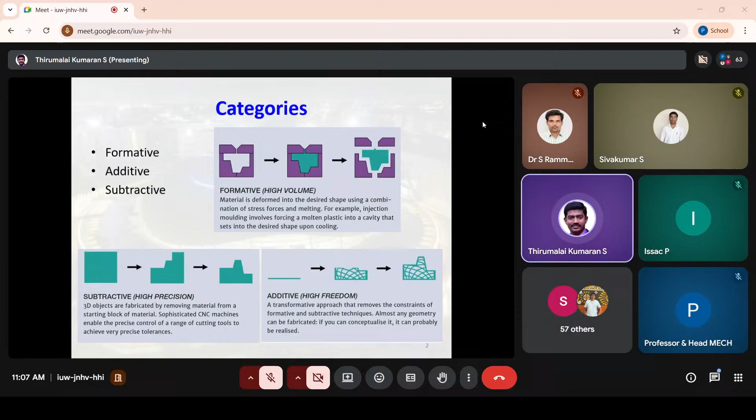And by conventional, the next category is subtractive manufacturing, where all our CNC milling, drilling, boring, reaming, tapping, everything comes under this subtractive manufacturing. This has to be chosen when you need high precision. So basically we have to choose the right manufacturing process for manufacturing our product. This is the basics.

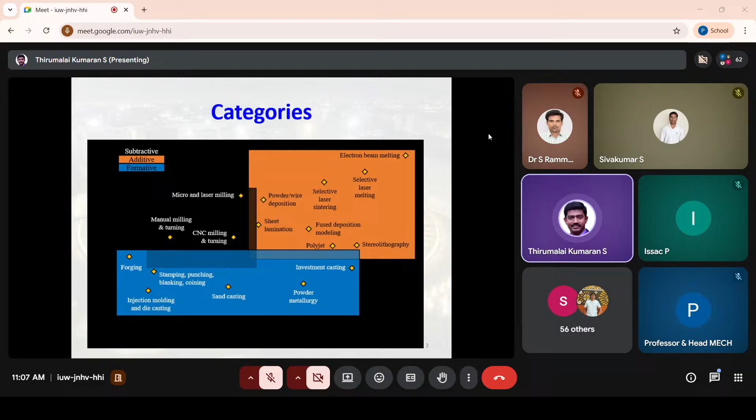As I told you about the classifications, in this lecture I will be talking only about subtractive manufacturing, because additive manufacturing is a new topic I will cover separately. So I will focus just on subtractive manufacturing. Basically we know that in normal subtractive manufacturing we have turning, drilling, milling and some other operations.

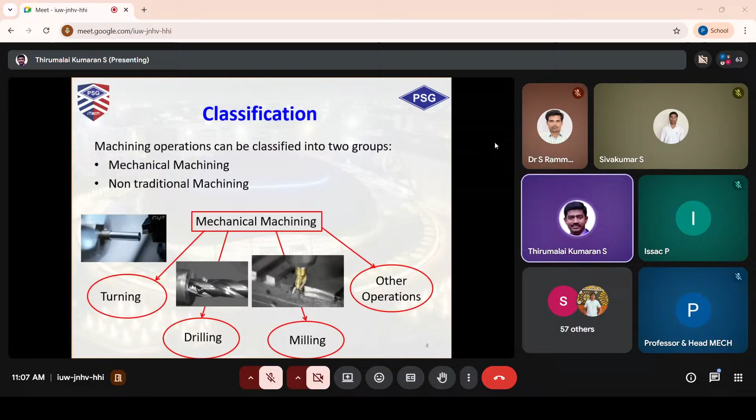So in mechanical machining we have these categories, and there are also some non-traditional machining categories. In non-traditional machining we can classify into four different types. One is by using mechanical energy, that is ultrasonic machining and water jet cutting. This comes under the mechanical energy process, where you use mechanical force to remove material and create an end product. These things come under non-traditional machining.

Then comes the electrochemical process, where ECM, electrochemical machining, comes into picture. Here we use some chemical substance and electrical current. So it is an electrochemical process through which we remove the material.

Today, advanced new technologies like biomachining have emerged, where they use bacteria and do a lithography process to remove unwanted material. This is called biomachining, which is recently very popular. In India, only 3 to 4 members are working in biomachining, so the demand is very huge, but there are not many scientists or faculty working in that area. Abroad, biomachining is very famous, because it needs the help of chemical engineers and biotechnologists. So this also comes under non-traditional machining.

Then comes the third category, called thermal energy process, where we use thermal energy like heat, either from an electron beam, a laser beam, or a plasma beam. We use purely thermal energy to remove material. And finally comes pure chemical machining without electricity. So these are the types of non-traditional machining.

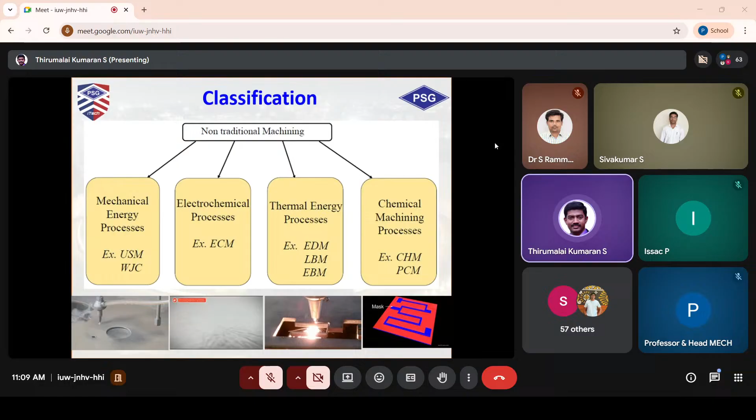You may have recently gone through papers addressing either traditional or non-traditional machining, but my area is about hybrid machining, because in the conventional machining processes I've just discussed, we cannot achieve very high precision machining. Suppose you expect that in your component you need an accuracy level of 10 nanometers - that is not at all possible using either non-traditional machining or conventional drilling or milling.

So 10 nanometer precision is very high in demand. Similarly, if your material removal rate should be approximately 10 power minus 3 or 10 power minus 4 mm cube per second, that is also not possible with conventional subtractive machining. So this is the objective you have to fix first: why you are doing the work and what is your target precision level.

As I told earlier, if you need higher precision, you should go for subtractive machining. If you need higher degrees of freedom, you should go for additive manufacturing. And if your number of samples is high, you should go for formative manufacturing. So our objective in subtractive machining is precision - you need to define the precision accuracy you are expecting and how it can be approached, and what type of subtractive machining you have to choose to achieve this high accuracy level.

But whatever we have discussed so far - normal drilling, milling, and boring, and non-traditional machining like mechanical energy, thermal energy, electrochemical energy - we cannot achieve this high precision. That is where hybrid machining comes into picture. Suppose you want to integrate the positive and negative aspects of different processes - for example, you choose grinding only when you need surface polishing, and lathe is done for cylindrical objects for a certain output. So we can integrate these types of subtractive processes, which is called hybrid manufacturing or hybrid technologies. So for a researcher, please don't expect only conventional machining or manufacturing processes - create some new hybrid technologies so you can achieve a better accuracy level through subtractive machining.

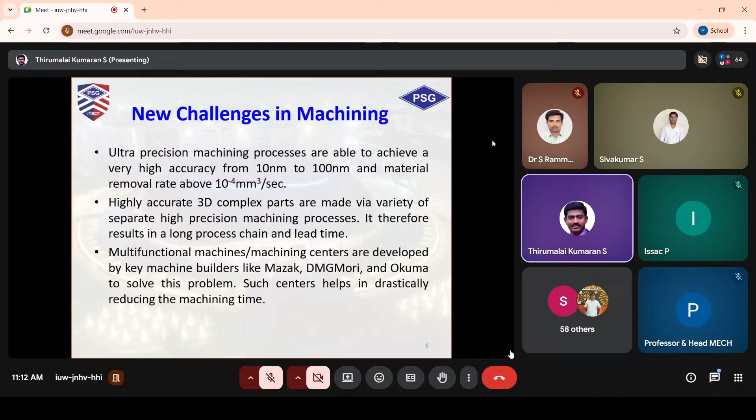Yes. No response. Am I audible? Yes sir, you are audible sir, your voice is audible. Maybe they are not interested, I think so.

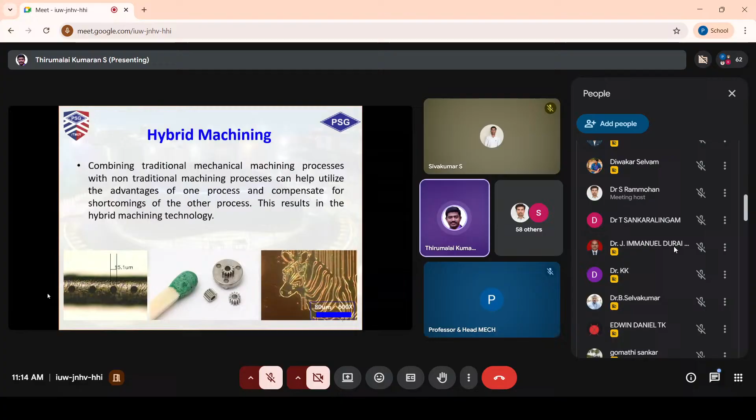Then you formulate the challenges - whether to do the conventional process, subtractive machining, a normal drilling process - and find out which subtractive machining or hybrid technologies you can choose to get this precision level. My precision level here is a 15 micrometer drilled hole. So this is the first task.

Now see the second picture. Can you see the gears, how they've been formed? See the size of the gears, compare with the matchstick. This is the precision level you should achieve through subtractive manufacturing, which is not at all possible by conventional methods - drilling, milling, reaming, planing, whatever you choose, you cannot achieve this.

Even you cannot achieve this using non-traditional machining, so that's where you have to prefer some hybrid technologies. You should have a clear objective, clear target, what your precision level is, then choose which process can be selected and which hybrid technologies can be mixed, and face the challenge to create this product. And the third picture, can you see?

It's just a zebra, but see what micron level - we've created this in an 80 micrometer sheet, 80 micrometer, that is 80 times 10 to the power minus 3. Very thin metal sheets, we have created this. We used biomachining actually - earlier I told you about biomachining - we used biomachining to fabricate this third picture.

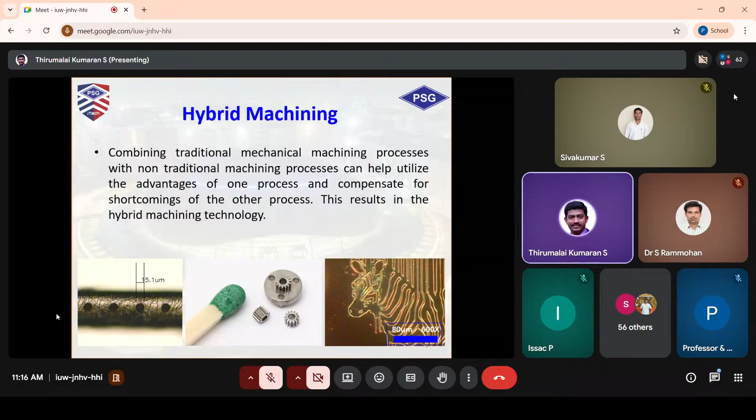So there are many other technologies in hybrid machining. One by one I will inform you, and later I'll move on to optimization. In hybrid machining there are several types. The first type is sequential. Sequential means, with the name itself you can understand, the process will be in sequence - first you complete one process, then after completion proceed with the second process.

For example, you do turning, remove the material, then go for milling, remove the material, then go for drilling, and get the final product. So this is a sequential type of machining. After completion of the first part, it moves to the second process. After the second process is over, it moves to the third process. So this is called a sequential type.

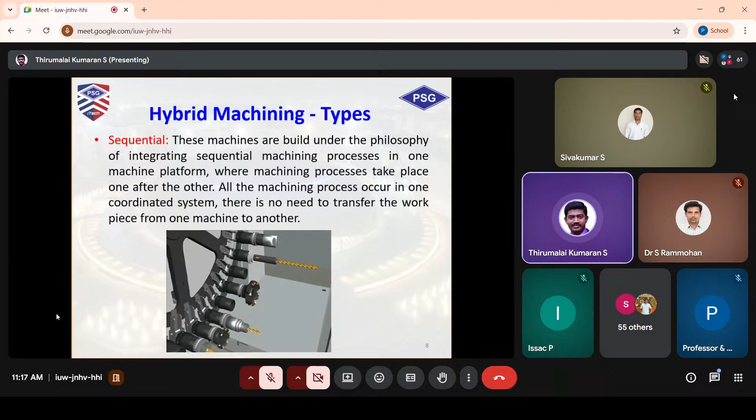It doesn't mean it should be only in machining - you can also couple processes, like one machining and the second process being welding. You can see this paper which we published in Materials Chemistry and Physics, Elsevier. What we particularly did is a hybrid technology between abrasive water jet machining and welding.

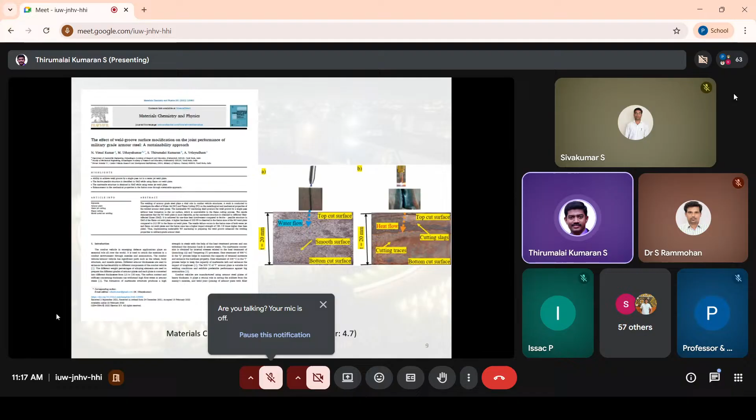Just imagine - we merged abrasive water jet machining and welding. These two are completely different processes, but we created a hybrid technology by combining abrasive water jet machining and welding. So this is the innovation to achieve the desired target.

So that publication won't be a big matter, we can easily publish. The only thing is we should achieve our objective. First clearly define your objective, you should have some challenges - without challenges, please don't select any research topic, otherwise it is very difficult to publish. Maybe some Q2, Q3 publications you can make, but if you want Q1 papers, target very challenging work and do some hybridization like we did.

So this is the first example of what we have done.

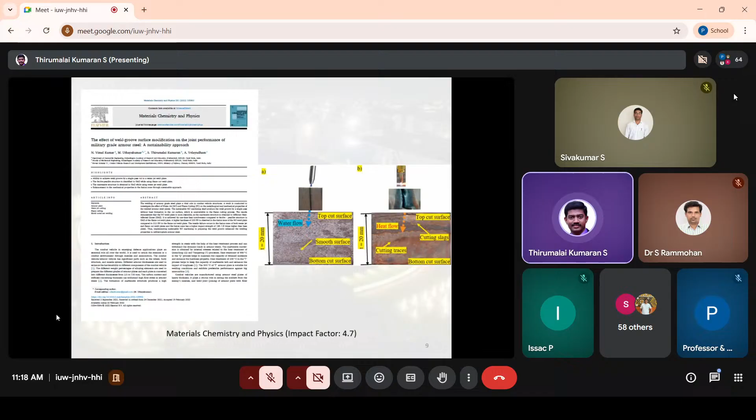So the first thing I've told you about sequential.

The second one is called assisted hybrid machining. So we have some assistance. For example, if you are doing a drilling process, you can make vibration to assist your drilling. So in drilling, the tool will also vibrate and do the drilling. So it is vibration assisted drilling. There are many other processes like this, laser assisted, vibration assisted. These technologies will assist you to do the normal process.

You choose lathe, you choose facing process. In that you can make laser to assist, you can make abrasive to assist. So these assists will help you. This is called assisted hybrid machining. I think it is clear now.

You can also make some media to assist, like cryogenic assisted or gas assisted. I think everybody is familiar with MQL, minimum quantity lubrication, so MQL assisted. So you can frame your process as assisted manufacturing or assisted machining to do your task.

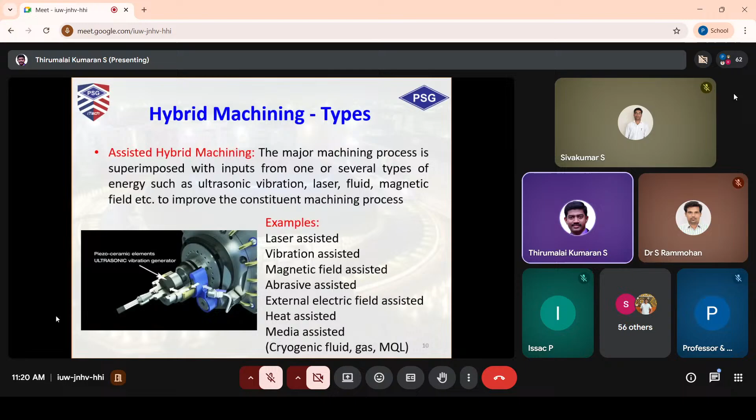For example, you can see this, one of our papers published in Measurement, with the title ultrasonic assisted EDM. I think EDM machining everybody knows, electrical discharge machining. The one which we preferred is die sinking EDM. In EDM we have two different types, one is die sinking EDM and the other is wire cut EDM. We preferred die sinking EDM and made ultrasonic to assist. To create the ultrasonic, we used a Langevin wave transducer, shown in the picture bottom right, to create the ultrasonic frequency and do the EDM process.

So we have made an assisted machining. Conventional EDM, everybody would have done, but we made ultrasonic assisted machining. So this is the novelty, so you can make use of creating a new process and achieve your target very easily. Publication actually comes out of this, so no need to worry about publication. It comes because it's a new technique, addressing a new novel process with a clear objective. Your novelty is clear, so publication will automatically come. So this is the example for assisted machining.

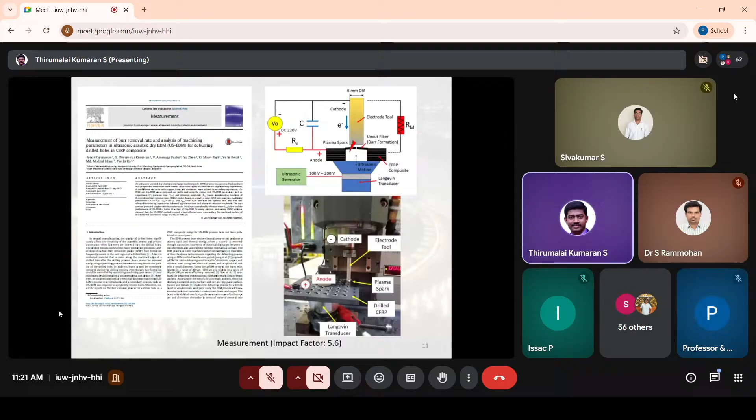One more example, published in Precision Engineering, again Elsevier. Here it is also ultrasonic assisted, using elliptical vibration to create a micro groove. The micro groove dimensions and depth are given in the picture. We created a comparison between without ultrasonic, how the precision level was, and with ultrasonic, how the precision level was. So you can just compare what happens when you do assisted machining. These are the examples of assisted machining.

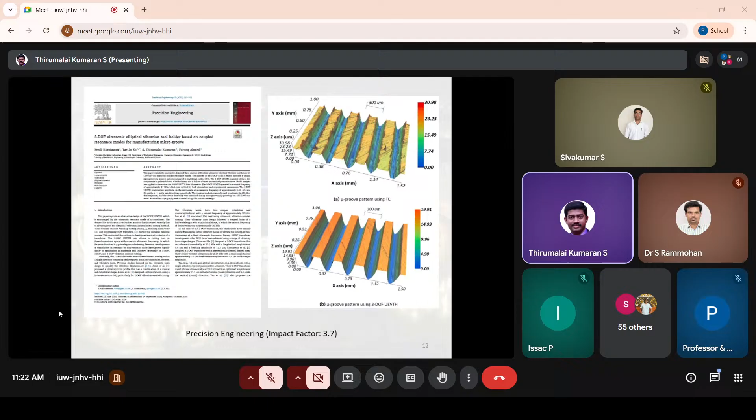The next type of hybrid process you can make is combining two hybrid technologies. For example, you know about chemical machining, you know about electrical machining, you can combine electrical and chemical machining. It is called electrochemical discharge machining, which is nothing but mixing chemical into EDM. So that is the difference. You have combined two techniques; you are not assisting or doing sequence here, you are just combining two different techniques.

You can see the second example, laser. Laser is a thermal machining process, using thermal energy, which comes under laser machining in non-traditional machining. You also have another category called electrochemical machining. You can make it hybrid by mixing laser and electrochemical machining to create a new technique. That is hybrid machining, merging two different processes to achieve a better output.

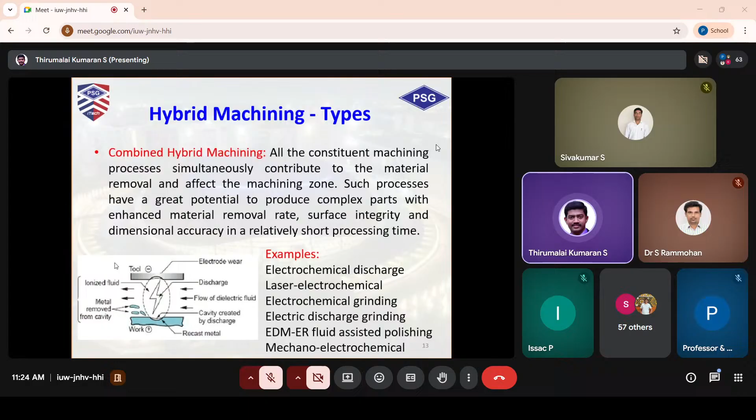Why this is required is that laser has some drawbacks: the heat affected zone will be high, the surface property will degrade, and the HAZ will also be high. But the temperature gradient is very good, so there are advantages too. When coming to electrochemical machining, the finishing will be very good, but the process will be very slow, whereas in laser the process speed is very high. So when you combine these two processes together, the disadvantage of one process is overcome by the advantages of the other, and the disadvantages come down while the advantages move on. That is why we combine two different processes.

So you can see the next one, electrochemical grinding. Everybody knows grinding is a conventional process, and electrochemical is a non-traditional process.

So I am just mixing it up, like conventional grinding with a non-traditional machining like electrochemical grinding. These ways you can imagine, and you can couple these two processes to create a hybrid technology. This type is called combined hybrid machining.

See, cryogenic comes under assisted machining. I think, if you have listened to my lecture, the second category comes under assisted machining, where you can assist with cryogenics, where you can assist with LN2. So that comes under assisted machining.

I've used drilling here. Drilling is a conventional machining, and I've used ultrasonic. Ultrasonic is also an assisted machining. See, I've just coupled three different machining processes to create an ultra precision product. So this is how you can merge different processes to create a component.

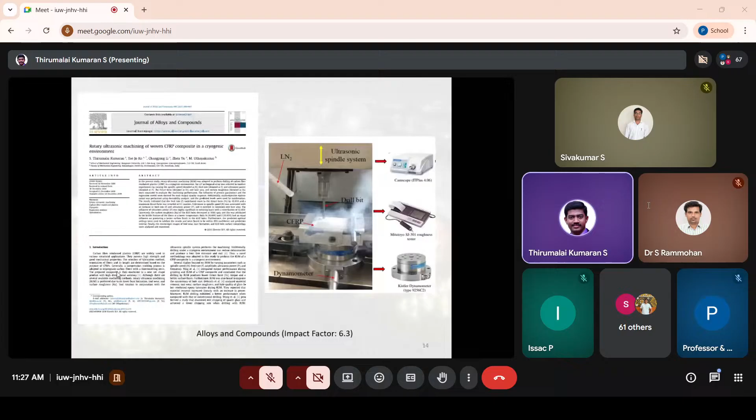Electrochemical discharge machining. I think you know about EDM, you know about chemical machining. I have included both chemical machining and electrical discharge machining. One uses chemical energy, one uses electrical energy. Both are different processes, so I am just combining both and doing the process.

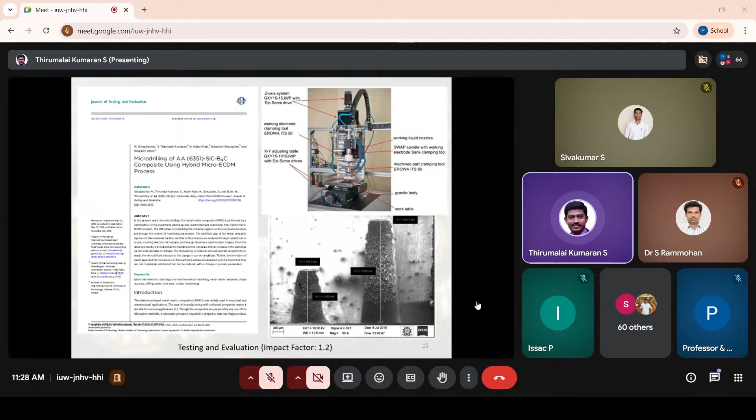So we can make these types of papers. Finally my first half is over. I have just generally introduced what hybrid machining is.

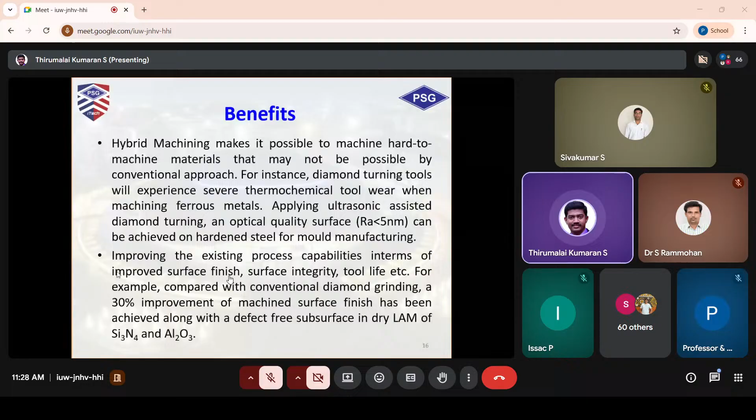Normally you have to do hybrid machining when you have to reach a high precision level, whenever your Ra value should be very low. Recently there are many processes used in hybrid machining where the improvement is around 30%. So that is achieved. Please try for some hybrid process like this. So this is the benefits of hybrid manufacturing. Okay, I'll just skip this.

My second half is about optimization. I think first I will tell you why this optimization is needed, and then slowly I will be moving on to the different types. I think everybody knows this, but how to approach a problem, that is the key thing I will be informing you now.

In industrial revolution, I think we have several industrial revolutions, and currently we are in industrial revolution 4, but we have 5.0. 5.0 was already discussed in 2022 itself. It is not new actually, but still we are not used to this industry 5.0. So if you can address based upon this, then your research will be highly acknowledged.

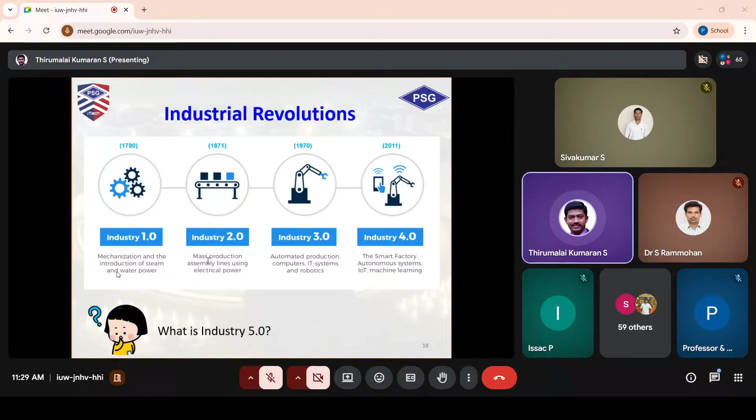So what is industry 5.0? You have to work with the computers - the intelligence of humans and the backbone skills of the computers. So it has to be cooperated and used. That is industry 5.0. Man and machine have to work together. This discussion was held in April 27th of 2022, and it is still in discussion only.

So this is about industry 5.0. According to this, we have digital manufacturing. I think you would have heard about virtual manufacturing, digital twins, and IoT. So there are many processes which you can adapt, in addition to the technologies whatever we have discussed now.

So like your hybrid machining, by implementing a digital manufacturing process to create a better product with high precision accuracy. Your title can be in this form. So you can implement some digital manufacturing concepts to achieve your objectives. So that can be done.

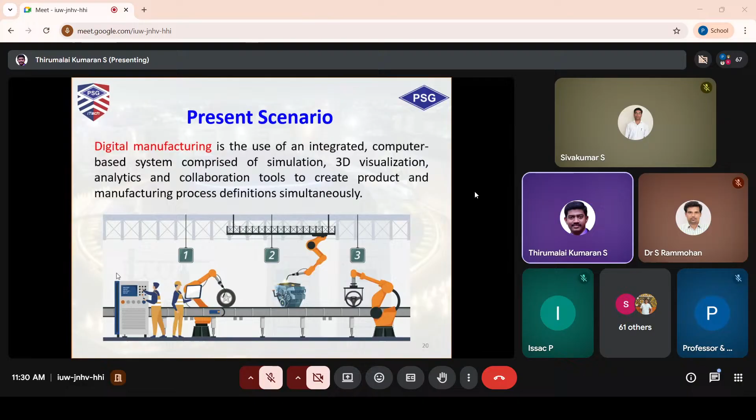So IoT, digital twins, all these things will support your experimental data. Please don't think that IoT, digital twins, and all digital manufacturing is your work. It supports your work, so keep that in mind. When you do research, use this as supporting information for your experimental work. Don't just believe these digital manufacturing values or IoT values. It should be an add-on for your experimental work. Then only your paper or your research will be at a higher level.

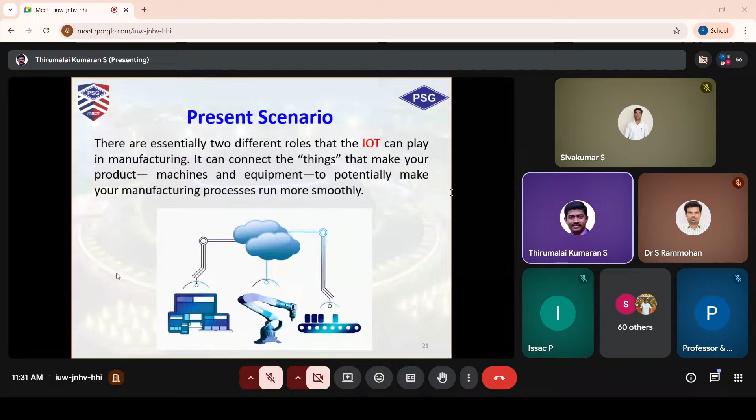Okay, now coming into the optimization part. We have two different types of optimization. Normally what everybody does is process optimization. If you are doing machining, they just change the speed, change the feed, change the depth of cut, and then they study. They do different types of experiments, do some optimization process, and then publish a paper.

It is like a black box. So you cannot publish nowadays if you use some basic formulas or basic process optimization - it is very difficult to publish. You cannot publish in Q1 journals. Maybe Q2, Q3 you can publish, but your target should be at a higher level. Please publish only in Q1 journals.

So if you do process optimization, you have to implement ML and AI techniques. Previous lectures would have covered what ML and AI are, and different techniques - maybe in future FDP sessions you'll learn about different technologies too. But the only drawback in AI and ML is you need more and more data. You cannot just do it with 30 data or 50 data or 100 data - you need thousands and thousands of data.

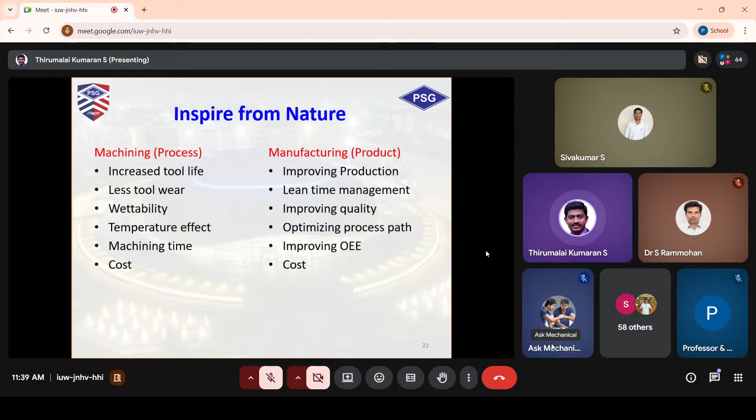So you can just switch to this product optimization or manufacturing process optimization. So a better example.

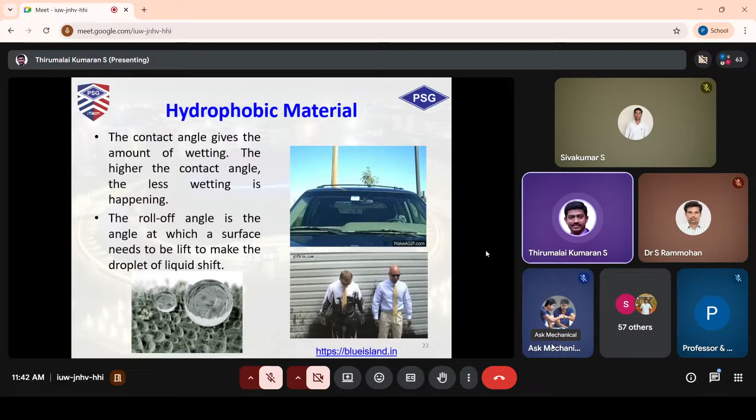So if there's increase in tool life, what happened to the tool wear? Tool wear comes down. So these things we can address, and this is a novelty which the research expects.

So you can clearly frame your objective: this is my target. My objective is to create a hydrophobic effect and to increase the wettability in my tool. So that you clearly describe in your paper, in your manuscript, and this is how I am going to address this. So we have proof and many are doing this. Then you clearly give your literature review, and with that literature review you address your problem.

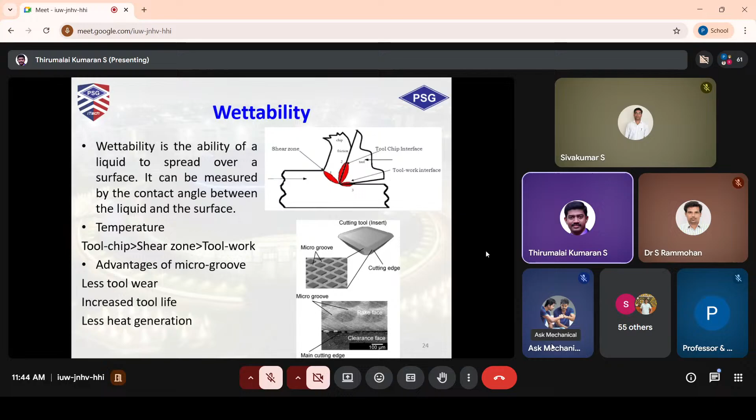And then you can see this, one of our papers which is published in Materials and Manufacturing Process. The first picture shows you our tool insert, surface texture tool insert. We created a pattern in the tool insert with some spec, and we reported that, and we did the machining study.

A normal machining study, we have not taken some composite material, just normal steel. You just buy a steel, conventional 1045 steel, and then we did the milling by using a patterned tool. This pattern tool is nothing but based upon the hydrophobic effect which we got through the lotus leaf. We created some pattern in the tool, and then we did this.

So what finally happened is the thrust force came down. I think those who are doing machining, maybe you know what thrust force is. The thrust force came down, the tool chip interface temperature came down, and the tool wear was good, it was less, and the tool life was good. And a higher precision level we can achieve on the surface of our material. So these things we clearly reported and our manuscript was accepted.

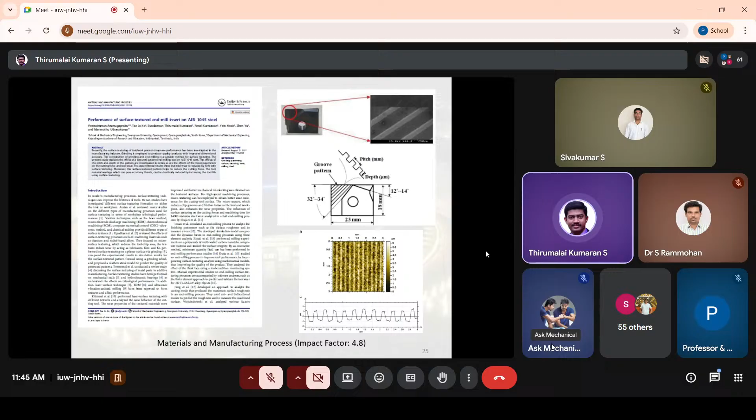So anyway, the wettability will be good. Nowadays people create different types of patterns, different types of structures like this, and they just do the machining. And finally, they report that the process is good.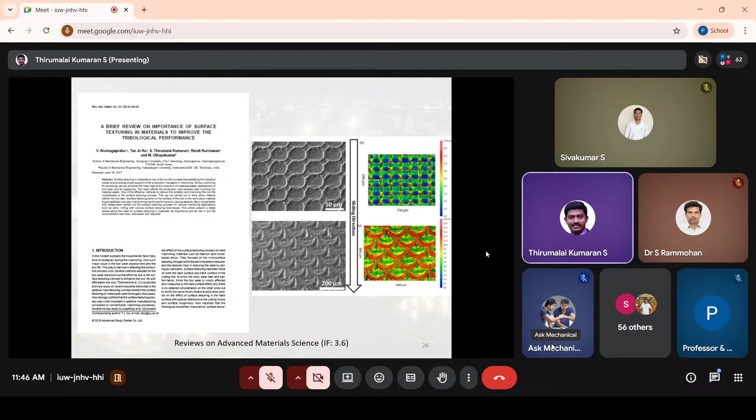Okay, and the next one is, the first inspiration was from the lotus leaf. Our objective was the hydrophobic effect.

Just a minute, it's noisy. Just a minute.

Okay, sorry. So the second inspiration is from the mosquito actually. You know the mosquito needle, when it bites, how do you feel? Sometimes you can feel, sometimes you cannot feel. It just comes and sits on you, it sucks blood and it leaves. Sometimes you can feel, but sometimes you cannot. So what you can do is make the structure of that probe.

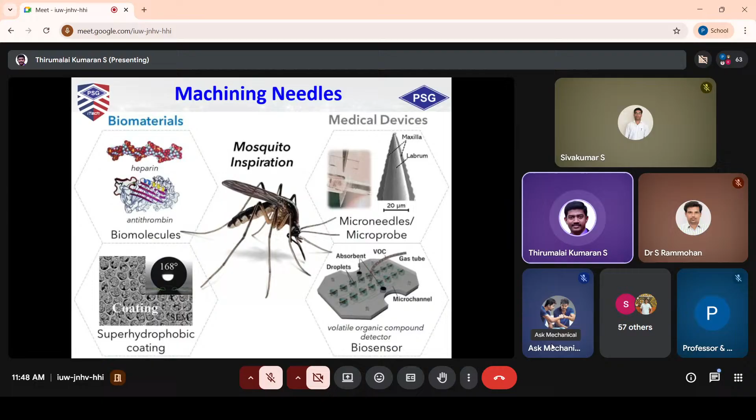So similarly, there are many inspirations you can see. I've listed some: electric eel inspired stretchability. If you can inspire from the electric eel, which has good stretchability, you can create a component by inspiring from this electric eel.

An octopus inspired adhesive ability. You know what is adhesive, how the suction cup of the octopus works. So you can get inspired from that, take that model, see how that high suction is happening, and then with that knowledge you can create an adhesive material inspired from the octopus.

And elephant trunk inspired structure. Normally you see an elephant trunk, it can just like that lift a huge tree, a huge block of tree, but it doesn't have bones, only muscles. What is there in the elephant trunk? That should be an inspiration to create a structure which can have high strength. So it has to be inspired from the elephant trunk.

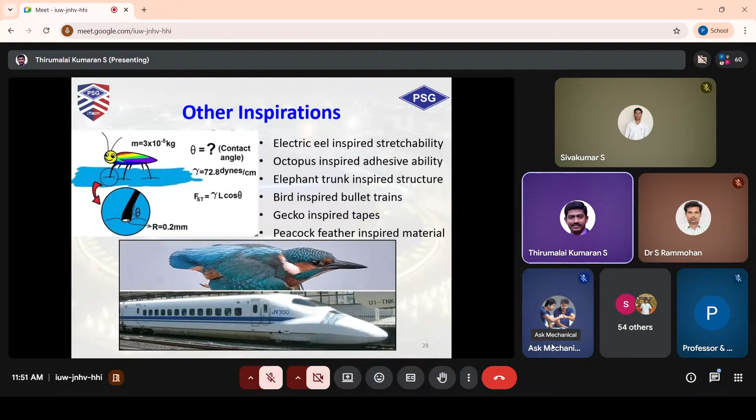So again, please don't use this regression and desirability analysis, all these are very basic. You try to code some, nowadays we have ChatGPT, you have Python. Try to code with the data whatever you have, and then you can use that code for publishing. Don't merely use conventional techniques like Taguchi technique and grey relation, and don't use regression analysis, don't use RSM, these are very old techniques. Manuscripts require new techniques, new concepts, new optimization algorithms, new technologies. So please address something like that to make your paper accepted. These things come under process optimization.

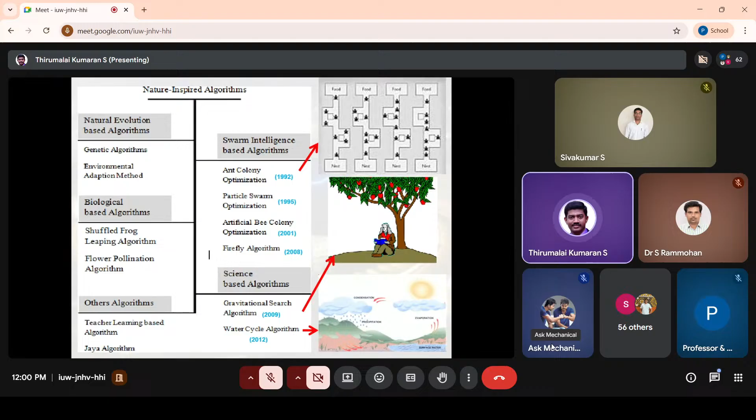That's why I'm more focused towards optimization algorithms. Finally, the future prospects should not be only conventional machining. It should be hybrid technologies, as I told you, either sequential or assisted. Or you have to inspire from nature, like the lotus leaf inspired tool I showed you, and the mosquito needle inspired material. This is called biomimicry. You can search Google Scholar with the term biomimicry — there are lots and lots of papers on this. Please start working on this, and please focus on quality and improvement of production, not the process.

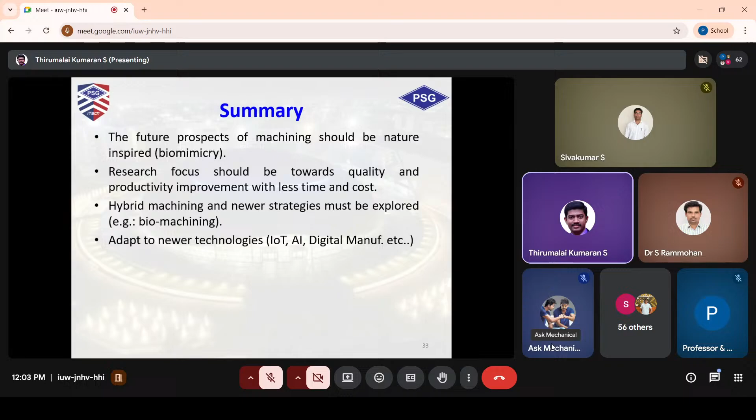Please don't say 'I've done AI/ML, please accept my paper' — it is not just for show off. It is only an add-on to improvise your results. So please keep that in mind. That's it from my side. This is my contact — any more doubts, I'm ready to address.